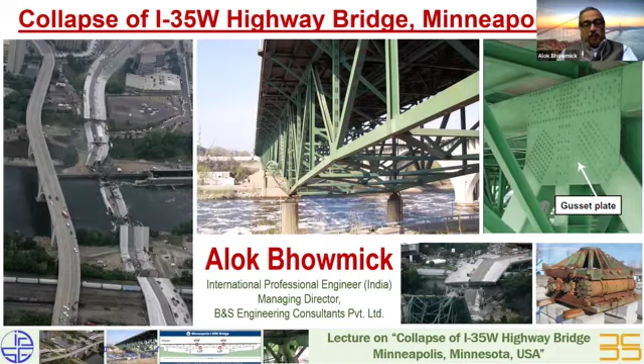In this particular case, the NTSB, after the forensic structural investigation, did make recommendations to FHWA and AASHTO officials. AASHTO is the American Association of State Highway and Transportation Officials. They develop codes, like we have IRC codes in India. Similarly, in the US for bridges, we have AASHTO codes. Based on the failure, the NTSB has given recommendations as to what changes are to be made in the codes and in the policy framework so that these failures are prevented. This is an ideal situation. This is what should happen in case there is a failure of any structure.

This is the broad outline of my presentation. Let me just mention that I was not involved in any manner, neither in the design of this bridge nor in the investigation of the collapse. All the presentation material that I'm going to give you is taken from material available in the public domain, either in books or if you just Google, you will get a lot of material, maybe more than what I am presenting here. So my suggestion and advice to all students: if you want to dig further into this subject, you can freely Google and get a lot of information.

Most of my case studies would have this content, which means it will be in 4 parts. First, I will talk about the collapsed bridge and its salient features. Then I will talk about the history of maintenance of the bridge. Third will be the possible cause of collapse. And the final conclusion, mentioning the lessons that we learned from this collapse. This would be a standard content sheet for all the case studies that I'm going to present henceforth.

Now let me begin with the first part, which is about the collapsed bridge. This I-35W, let me first make clear what it means. I-35 is Interstate 35, and W means west. This is an interstate highway in the US, in the state of Minnesota, passing through the downtown of Minneapolis. All the interstate highways in the US have similar terminology.

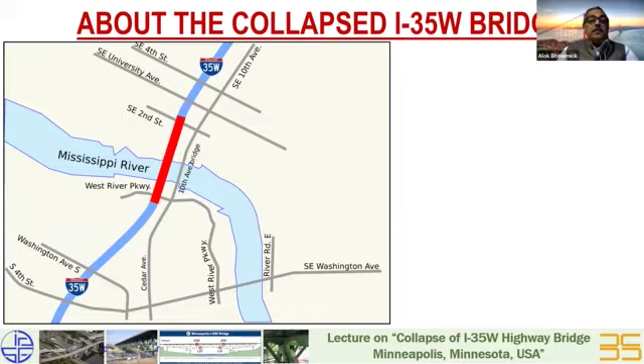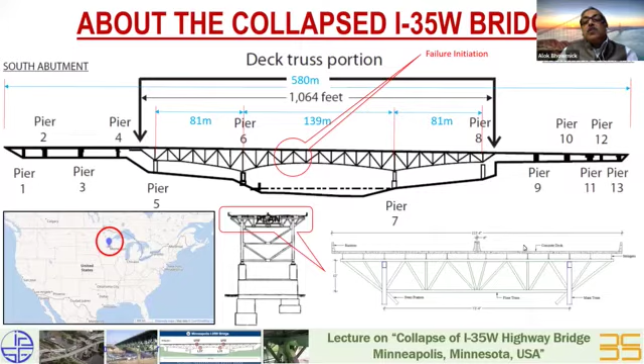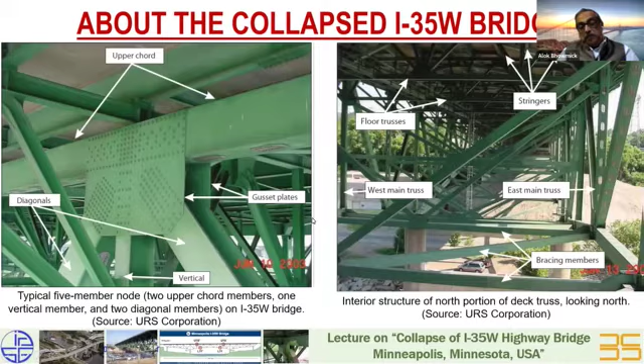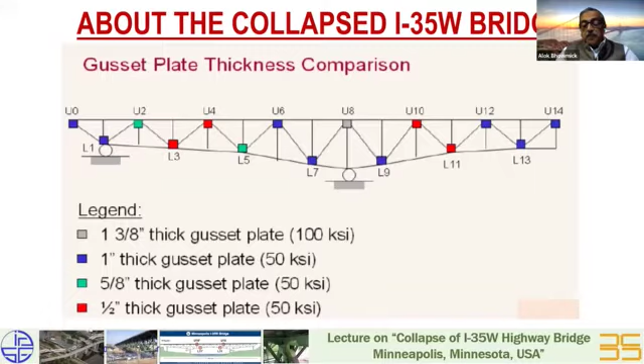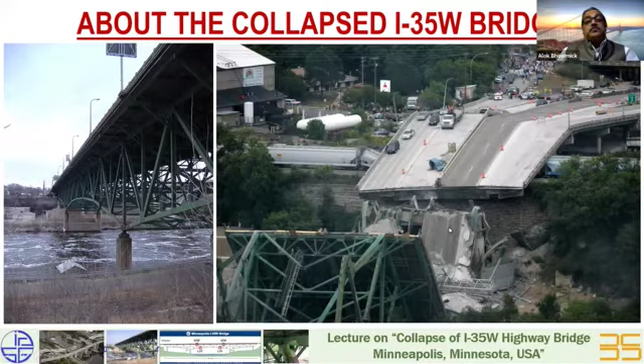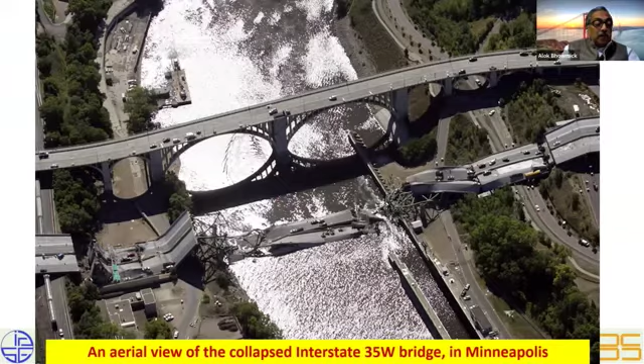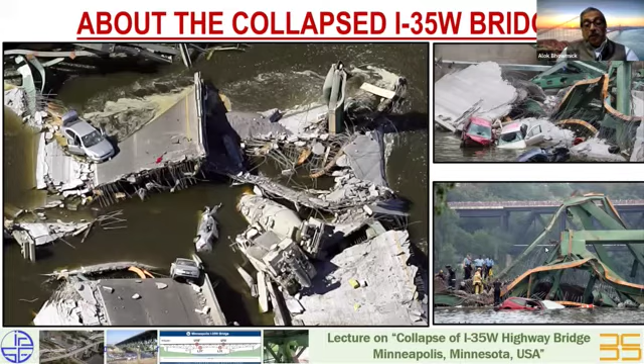top. This is another pictorial aerial view of the bridge, which is on the next day. It was on 2nd of August. The picture is taken, showing a beautiful picture. What you see, the second bridge, which is adjacent, a beautiful arch bridge, is the old bridge. It was constructed much earlier, and this bridge is, of course, one of the very famous bridges. This shows some other pictures, a very catastrophic collapse, because as I said, it was in the peak hours, evening, and some 50 vehicles actually got drowned. So therefore, you can see this picture of the collapse a day after the actual collapse.

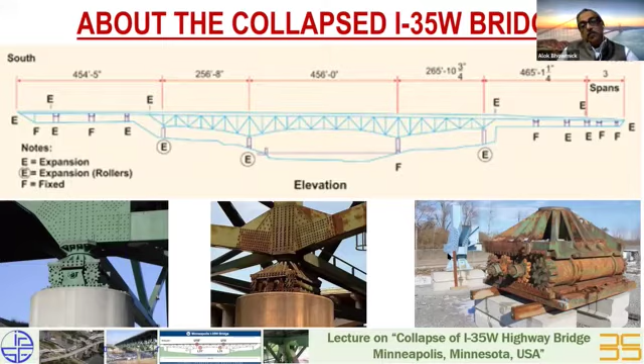This is another close-up view, just to show how the bearings are. You can see at this point you had the fixed bearing. At this point you have the roller bearing. You can see the roller so much.

And what they realized during the inspections before the collapse many a times, that these rollers, due to corrosion, got jammed. And this was also one of the attributes for the collapse of this bridge subsequently, because once the roller is jammed due to corrosion, which means it is not allowing free movement or free expansion of the bridge. And if you do not allow free expansion of the bridge, it would mean that there will be additional secondary stresses developing on the structure, and that was not accounted for in the original design.

Now, one more thing at this point I would like to mention, that you see this was designed way back in '67. At that point in time, the technology or the understanding of bridge behavior was not so much developed as today. Nobody at that time talked about fracture critical bridges. You see, this is a typical fracture critical bridge. What is meant by fracture critical bridge? If you have a bridge where if a single member is cut from here, that would lead to collapse of this entire bridge. It is called fracture critical.

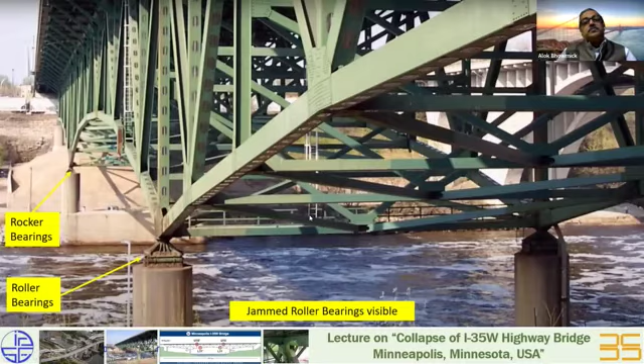So post this particular collapse in the US, there was a lot of realization about it. They immediately surveyed all the bridges in the US which are long spans and which are fracture critical, and they identified that there are many bridges which are fracture critical, and they had a different inspection roster for those fracture critical bridges. They require more frequent inspection because it is realized that any member failing in that particular fracture critical bridge can lead to the collapse of the bridge, which has happened in this particular case. So therefore, the fracture critical system has been identified after this collapse, and accordingly actions were taken.

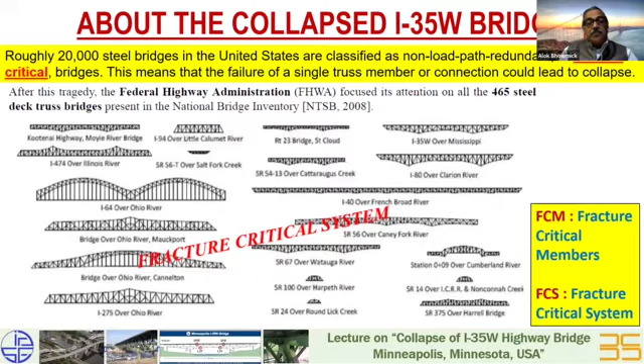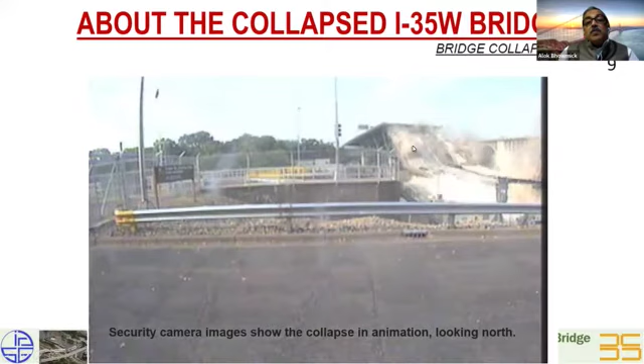So you can see the dust. There are two types of dust. One dust is when the structure is falling on the ground and the dust created from the structure which is falling on the ground. Another level of dust is being created from top of the deck, which is because there is a lot of aggregate and sand which was piled up on top of the deck, and that is also creating dust.

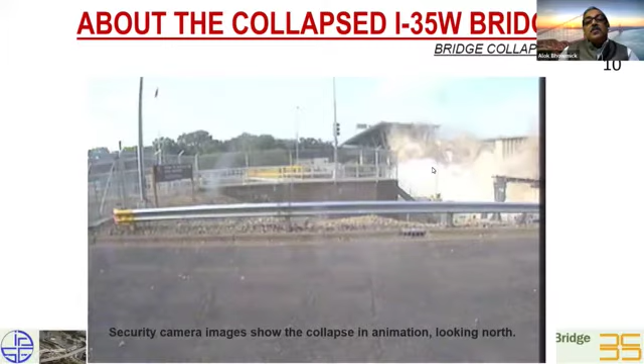So I have a small video to show an animation. It's a very small video. I would like to show that.

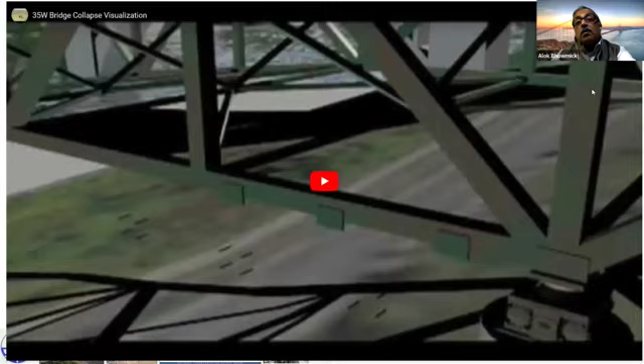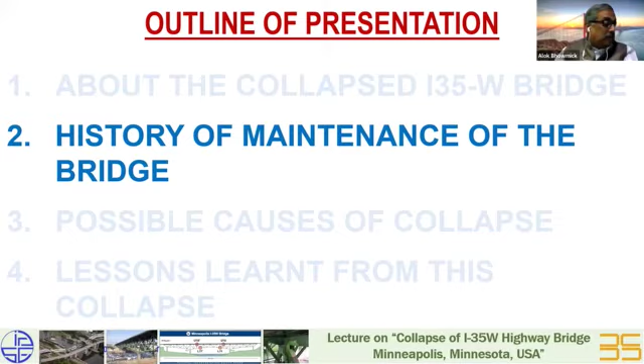Yeah. So I think we now go to the next part of my presentation, which is history of maintenance of the bridge. The bridge has, in fact, had a long history of maintenance and repair before it actually collapsed.

Am I audible now? Yes, sir. Okay.

Way back in 1990, 17 years before the 2007 collapse, the bridge was classified as structurally deficient by the US Department of Transportation because corrosion of the bearings prevented sufficient movement, as I mentioned earlier. The classification was based on a score of 4 or lower on a 9-point rating system. Now, what is structurally deficient?

Let me clarify here. The label structurally deficient doesn't mean that the bridge is unsafe. It means that the bridge would require significant maintenance and repair to remain in service, but it is not unsafe still. But it is a red flag.

Then in 1993, the federal transportation officials increased the frequency of inspection of the bridge from once every 2 years to every year. Because of this red flagging, they had to change the roster, and they used to inspect every year. They found some corrosion of steel in the bridge joints and fatigue cracks in the bridge approach spans. Therefore, they took care of this.

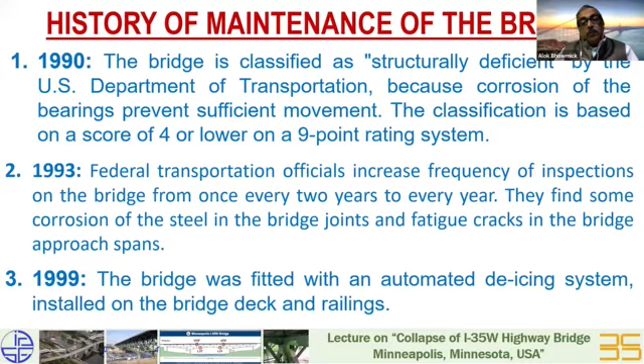In 2001, there was an independent study by the University of Minnesota, which once again deemed the bridge structurally deficient. But at that time they also mentioned that although it is structurally deficient, it doesn't require immediate replacement. Then in 2004 to 2007, another independent study was carried out by URS Corp. exploring the bridge's fatigue potential.

You see, by that time the understanding of fatigue of steel structures was quite developed. Not at the time of its original construction and design, but in 2000, 2004, 2007, a lot of fatigue problems were there in fact in all the steel bridges in the US, and here also there was no exception. Additional steel plates were recommended for critical members to reinforce the trusses, and to re-inspect the welds in the trusses to monitor the bridge's usability.

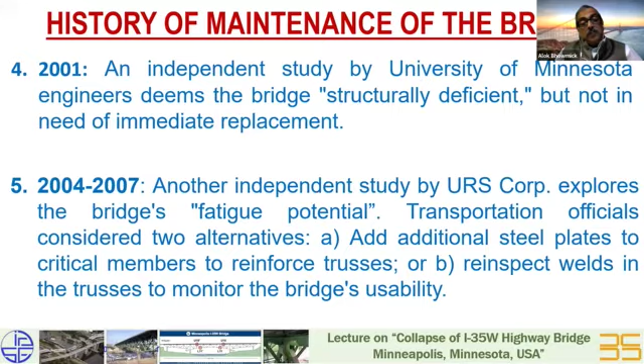Then transportation officials chose to re-inspect the welds and begin the work from May 2007. And they found that, whatever measures were taken earlier, there was no further growth in the existing weld cracks. So they were quite happy that the crack was not developing further. In summer 2007, just a month before the collapse, 2.4 million was spent on repair and maintenance being conducted on the bridge deck. In fact, the construction material I was talking about on top of the deck was mainly a part of the repair work going on at the time the bridge collapsed.

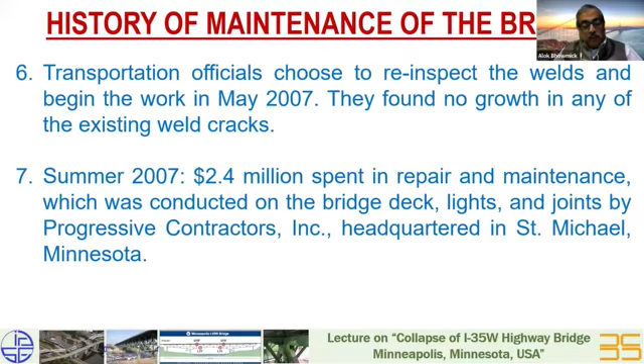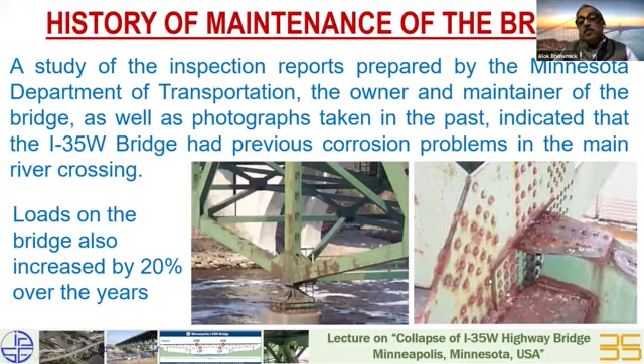A study of the inspection reports prepared by the Minnesota Department and the owner, as I mentioned, indicated that the bearings were jammed and loads were increased by 20%. All this was realized before the collapse. And if you can see here, this is the level of corrosion on the bridge which was seen at that time.

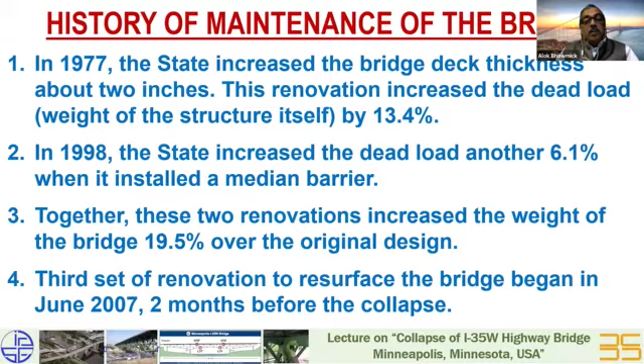Now, how this load developed also has a history, and this particular slide covers that. In 1977, the state increased the bridge deck thickness by about 2 inches. This renovation increased the dead load by 13.4%. In 1998, the state increased the dead load by another 6% when it installed the median barrier, which was not there earlier. Together, these two renovations increased the weight by about 20%. And then a third set of renovations to resurface the bridge began in June 2007, 2 months before the collapse, when these construction materials were on top, and they were overlaying on top of that, adding a few more percentage of dead load.

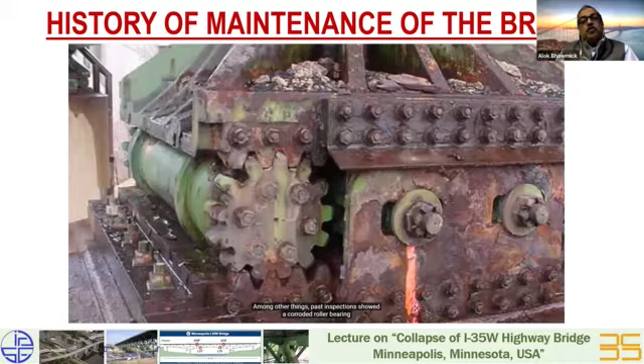This is a typical very close-up view of the bearing. You can see the level of corrosion here. Though in the NTSB investigation, they did not point this out to be the cause of failure. They said that although the bearing was in bad shape and corroded, this was not the cause of collapse. That's what they mentioned.

Can you please mute? I request all to kindly mute so that the presentation can be continued.

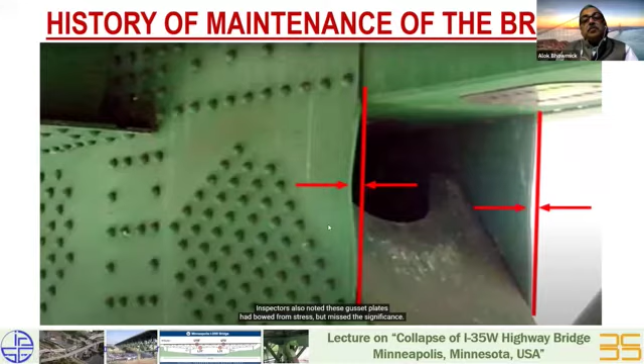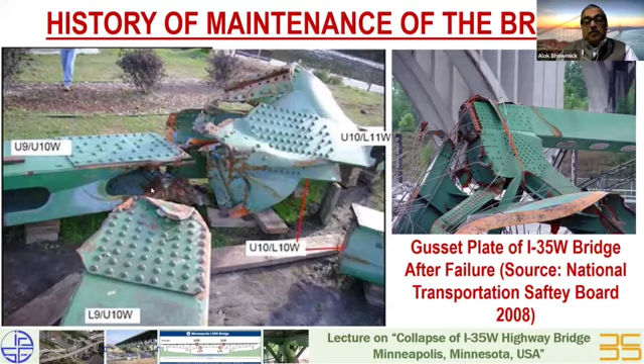According to a 1998 inspection report, there were numerous fatigue cracks found in the approach spans. These cracks were located in the negative moment regions where the diaphragm web stiffener was not welded to the top flange. And the bridge was designed and constructed prior to 1970s, when there was very limited understanding of the fatigue behavior of welded members and connections.

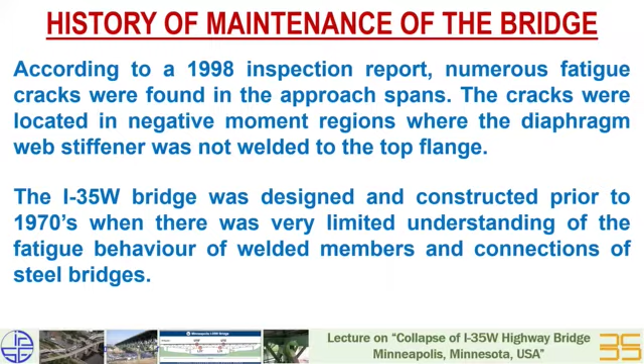Now I will come to the possible cause of collapse. So far we have seen what the bridge general arrangement is and what the history of maintenance is. Let me now focus on the possible cause of collapse. Before we go into that, let us understand the climate of the area. Minnesota has a humid continental climate with hot summers and cold winters. There are occasional snowstorms, floods, tornadoes, and fire hazards, which are a very annual feature.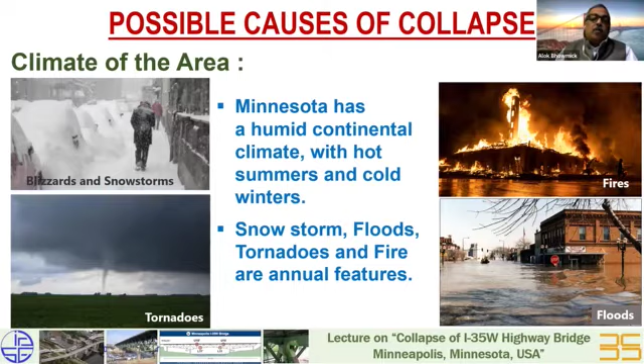And I mentioned that the trigger for the failure was the gusset plate failure at the U10 joint. However, it would be too much of a simplification if I say that is the cause of failure, because there was overloading, there was a lack of inspection of the gusset plate, and also, at the time of failure, there were construction loads on top, which were far more than the design live load. So all these caused the failure. Maybe the trigger was the wrong design of the gusset plate. So this is the trigger of the failure, as I told you.

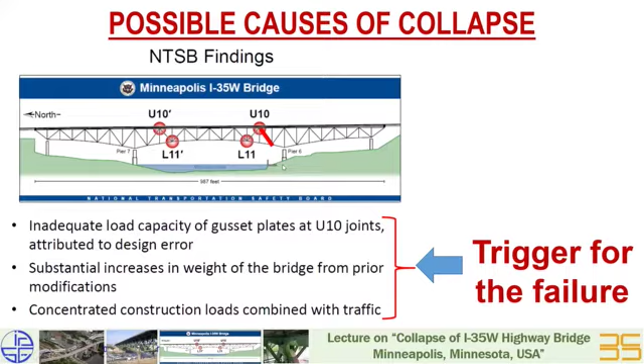U10 or U10 dash is symmetrically placed, but the failure actually started from here, and I will tell you a little more detail. You can see this is the point where it really failed. Possible causes of collapse: design error, inadequate load capacity of the gusset plate, thickness provided was half of what is required, and the design was deficient even as per the prevalent codes and practices at the time of design. Inadequacy in the design review process: no proof checking was done at that time, neither federal nor state authorities evaluated the design, and proof checking was not a standard practice. No importance was given to the gusset plate in the design and in the load rating.

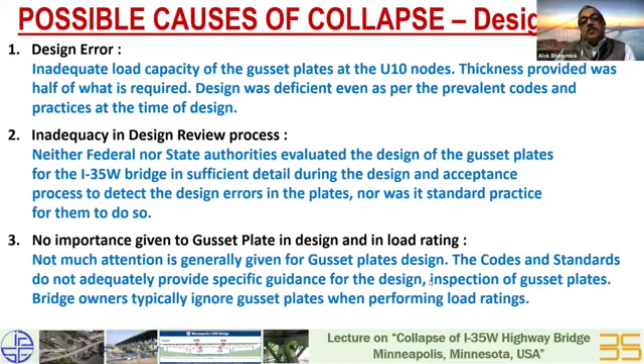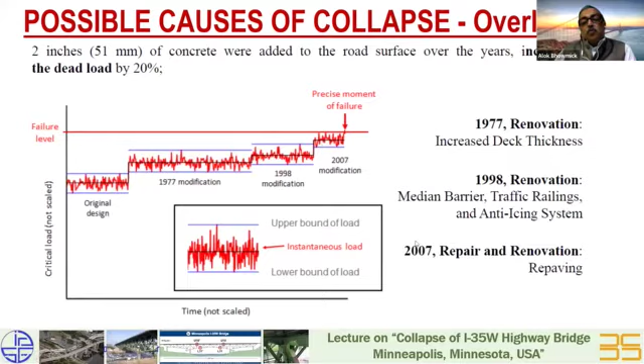And I mentioned the dead load increase at various times. Original design, the load was here. Then the load increased in the 1977 modification, further in 1998, further in 2007, before it actually failed here. So you can see this is a good way to demonstrate how the load has increased over the years. Then the construction debris, or construction load, added on top of the deck at the time of failure is another reason.

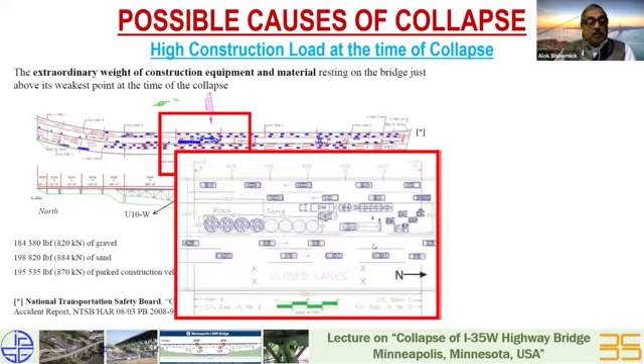Forensic analysis result by NTSB. The analysis points out these five points: insufficient quality control procedures of the bridge design firm for designing the bridge; lack of guidance for bridge owners with regard to the placement of construction load on bridges. Whenever you do construction, you have to take permission from the authorities as to how much load you can place on an existing structure. And this has been ignored. In fact, this is ignored in many cases. I'm sure in India also, when the contractor works, very little guidance is there as to what the do's and don'ts are.

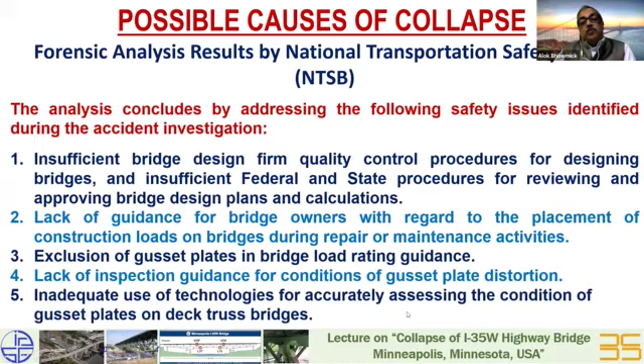Then exclusion of the gusset plate in bridge load rating, lack of inspection guidance for the condition of gusset plate distortion, and inadequate use of technologies for accurately assessing the condition of the gusset plate. Another thing: whenever there is a failure in any structure, it is not one agency doing the investigation. One agency is appointed by the authority, the client, to investigate. And in this case, it is NTSB, who was engaged by the owner. But other parties, the affected parties or the contractor, also appoint an investigating agency in parallel, because every agency will have to safeguard their interest after the collapse. Otherwise they will have to pay a heavy penalty, because the forensic investigating agency will always look at the bridge failure from the perspective of their client. If it is an owner, it will be from the owner's perspective. If it is a contractor, it will be from the contractor's perspective.

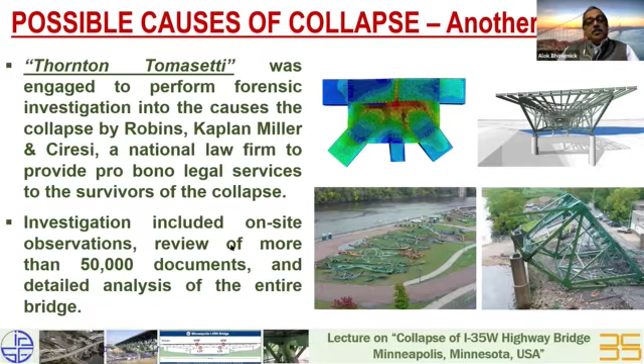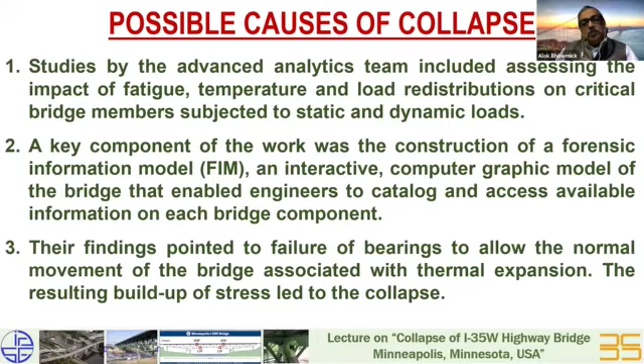And in this case, even the victims, those people who were killed in this collapse, appointed another agency, Thornton Tomasetti, a very famous consultant, and they did a parallel forensic investigation. Though in general they agreed broadly with NTSB, they had a different perspective on the trigger for failure. Their studies included assessing the impact of fatigue, temperature, load distribution, etc. And they did forensic information modeling, very interesting interactive computer graphics, and their findings pointed to failure of bearings as the trigger, not the gusset plate. Though they also recognized that the gusset plate was under-designed. Although all the other things are fine, according to them the trigger for the failure was the jamming of the roller bearing.

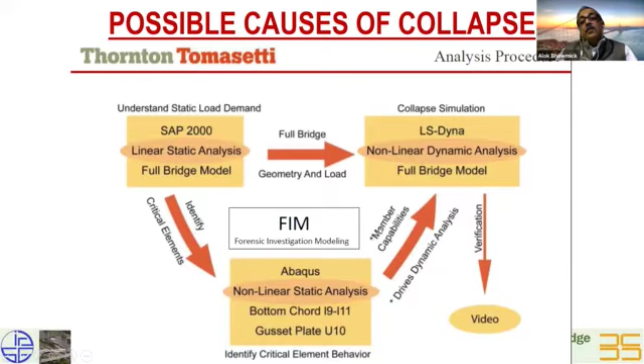So they carried out a very detailed investigation. They carried out a non-linear local analysis of the gusset plate, bottom chord. They carried out a global analysis of the collapse situation, and they used forensic investigation modeling, something which we do not do in India so far. And then based on that, they came out with, you see, this is their model in FEM, and you can see this is the portion which is that U10.

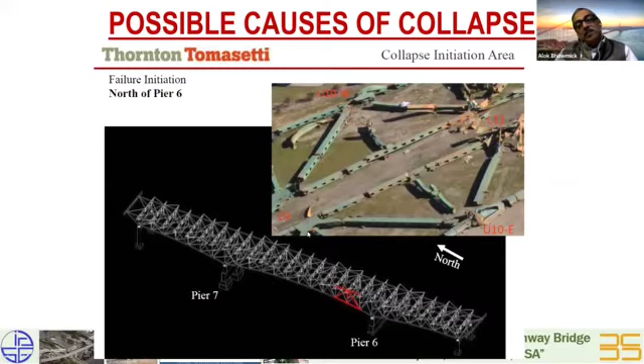This is the portion which actually failed, but it failed according to them due to the jamming of the bearing here. And this is a photograph to show the various members, that U10 thing placed, from the parts and components picked up from the collapse, and they put it on the ground just to replicate the two trusses, one side of the truss, the other side of the truss, and this is just to make people understand what is the status after failure. Very nice way of analyzing, investigating a collapse.

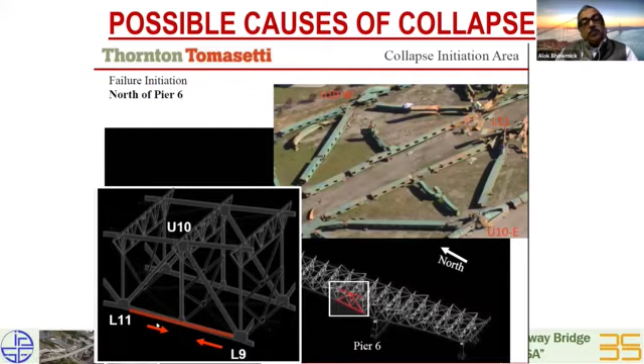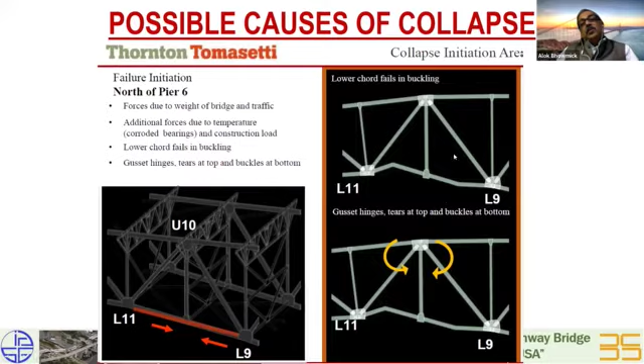So what according to them has happened is that due to this jamming, there is an additional force, due to that which occurred in lower member L11, L9, a compression, not tension, sorry. And due to this compression, this member buckled. You can see this member buckled. And due to this buckling, there was additional force on the already weak gusset plate at U10. And finally the gusset plate here, you can see it just failed, it just tore off here. And many photographs I showed you earlier demonstrated this.

So I think I will now show another small video, very interesting, which tells you in great detail this particular failure.

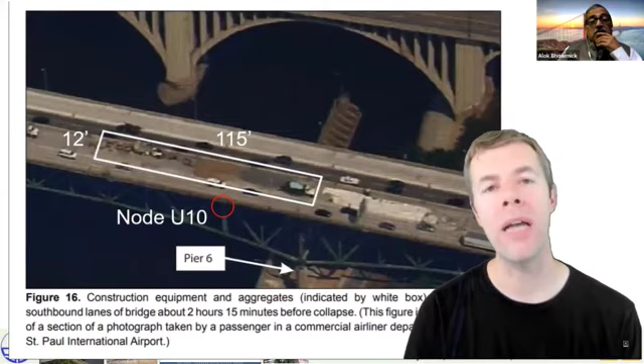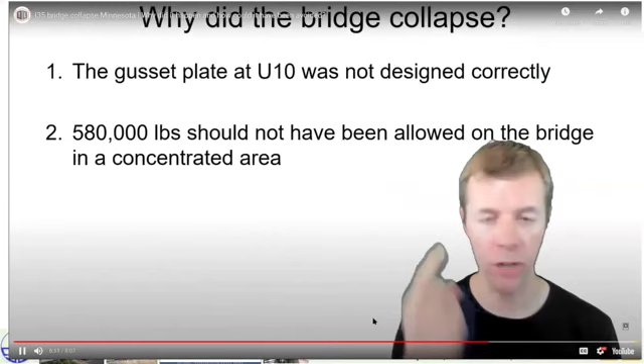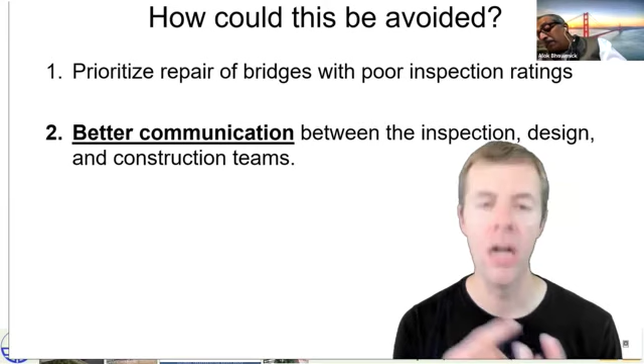Sir, we can't hear anything. The audio is not there. Okay. So am I audible now? Yes, sir, we can hear. Could you listen to the audio in this video, or was audio not there? No, sir, we can't hear anything in that video. Oh, I see. I will do one thing. In that case, I will also send the link, which you can share with others so that they can see it. Okay, sir. It can be shared in the group. What about the previous one? The previous video which I had shown? Yes, sir, that audio we could hear, sir. Previous one. Acha, you could hear the audio there, but not here. I see.

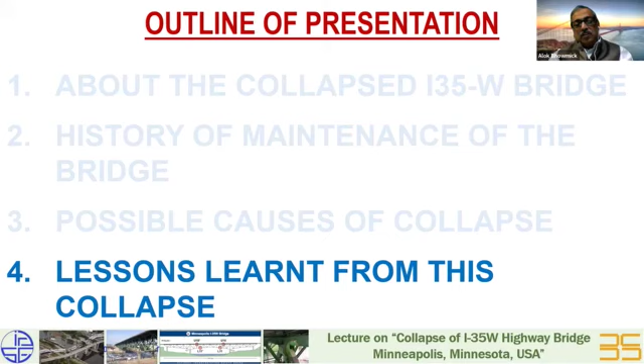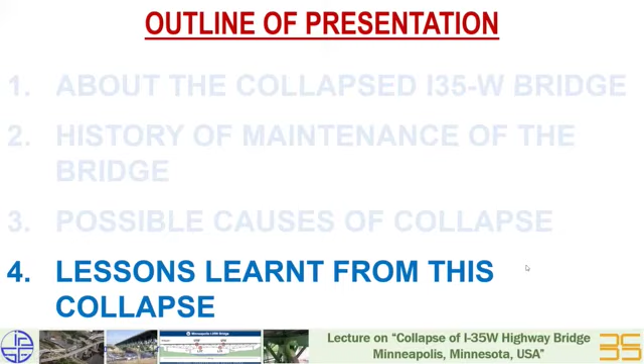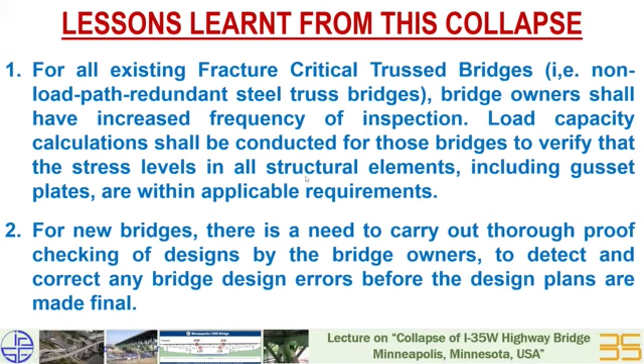Okay. So I come to the last part of my presentation, which is on the lessons learned from the collapse. What briefly I will tell you is, for all existing fracture critical truss bridges, I have defined what is fracture critical truss bridges, that is non-load path redundant steel truss bridges, the bridge owners shall have increased frequency of inspection. Load capacity calculations shall be conducted for those bridges to verify that the stress levels in all structural elements, including gusset plates, are within applicable requirements. This is the lesson that we learned from this collapse. And I think we should apply this even in bridges in India.

When you now go out and look at the bridges, you first try to see whether the bridge is a fracture critical bridge or not. And if it is a fracture critical bridge, you have to keep in mind that this is a bridge which requires more inspection as compared to other bridges, and you need to make sure that each and every component of that bridge is working so that the bridge does not collapse. Second, for new bridges, there is a need to carry out thorough proof checking of design by the bridge owners to detect and correct any bridge design errors before the design plans are made final. So independent checking of the designs before execution is a must, because every human being can commit errors.

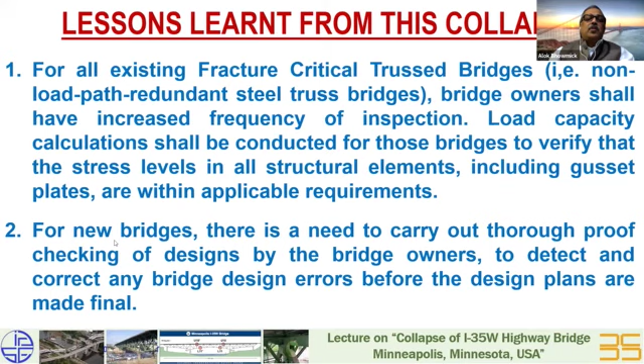Designers, no engineer is infallible. We can also commit error. The process should ensure that there is no error which is transmitted. If I have committed one error, my proof checker should be able to detect that, and therefore a screening is extremely important. Gusset plate is an important structural element. Design of this component deserves the same attention as any other component of the bridge. Inspection of truss bridges must include condition assessment of gusset plate as well, which was not there in this particular case.

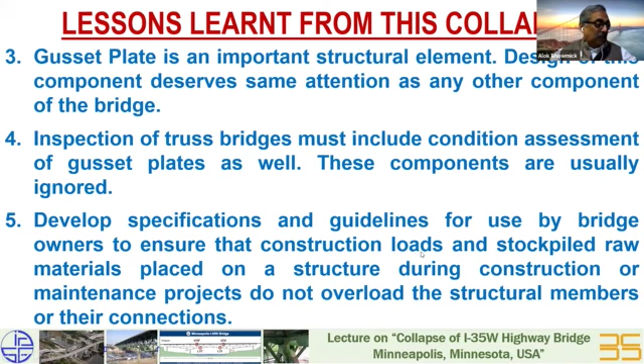Develop specifications and guidelines for use by bridge owners to ensure that the construction loads and stockpiled raw materials placed on structure during construction or maintenance do not overload the structural members or their connection. That is also another lesson that we have learned.